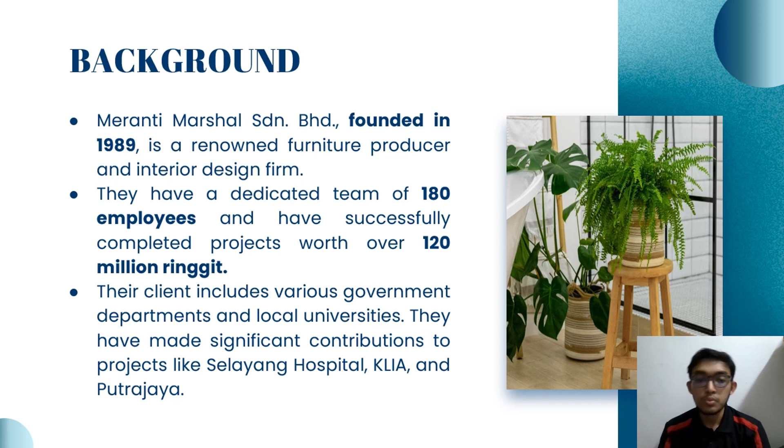Now we will proceed to the background of the company. Meranti Marshal Sendirian Berhad was founded in 1989, and it is a renowned furniture producer and interior design firm. They have a dedicated team of 180 employees and have successfully completed projects worth over 120 million ringgit. The clients of the company include various government departments and local universities such as UMK, UKM, and also including our UiTM. They have made significant contributions to projects like Selayang Hospital, KLIA, and also Putrajaya.

So these are the overview of the company. The headquarters is in Bandar Baru Bangi, and the manufacturing facilities is at Olak Lempit Furniture Complex in Banting. This manufacturing facility is where we went to do our industrial visit, and it is a highly automated manufacturing process.

The facilities include CNC metal and woodworking machineries, sheet and metal sheet fabrication, electrostatic powder coating line, and also the assembly process. So all of the products will be made there.

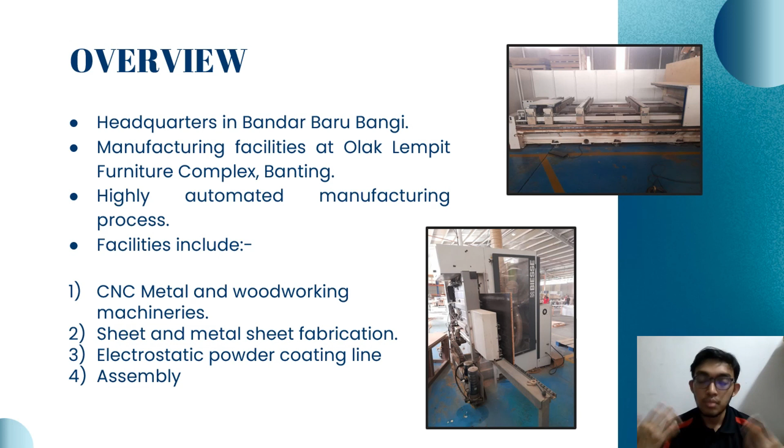So that's all for the introduction part.

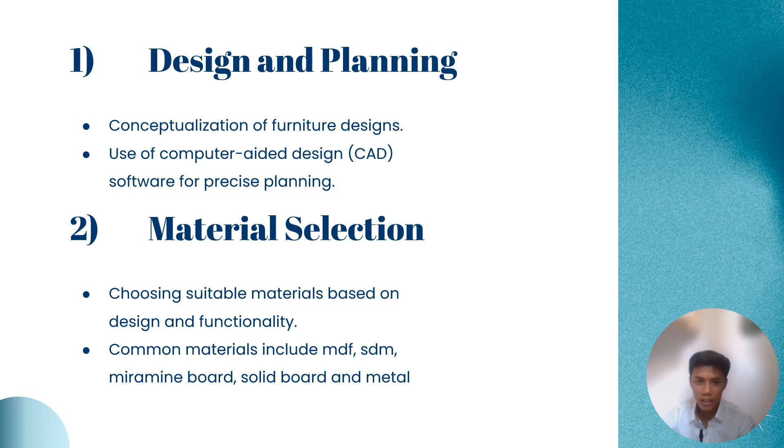For material selection, for the best product result, we choose suitable materials based on design and functionality. The common materials that we use for our product include MDF, SDM, melamine board, solid board, and metal.

Next, this is an example of material selection that we have.

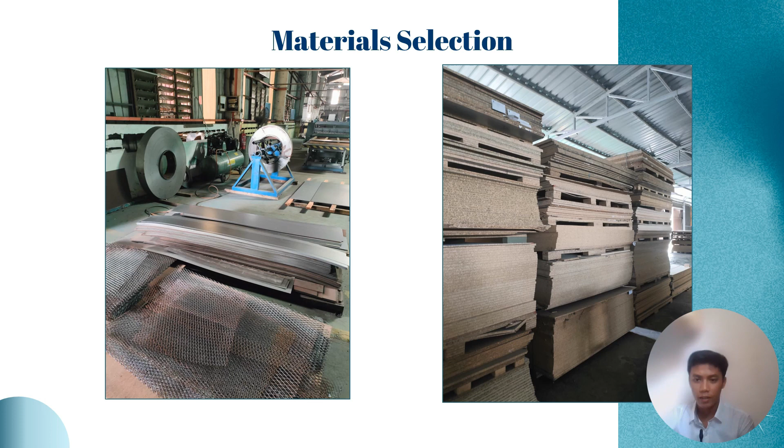For cutting and shaping, for more precision cutting of raw materials rather than using a saw, we use CNC, which is computer numerical control routers or laser cutting machines that operate on an AutoCAD basis. Then we shape our components through milling and punching machines.

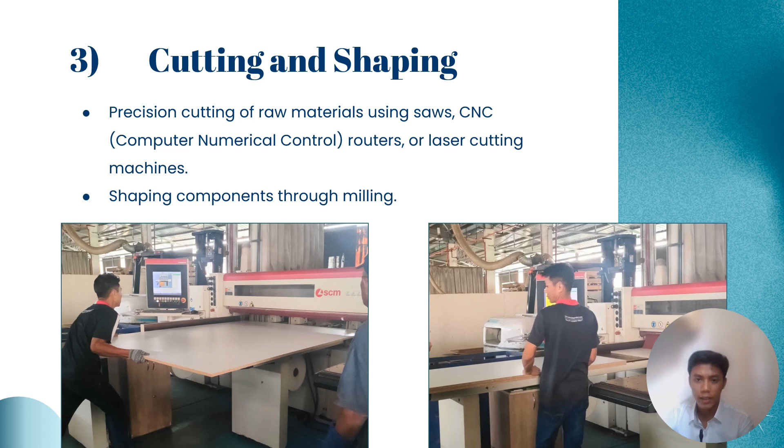This is an example of a laser cutting machine.

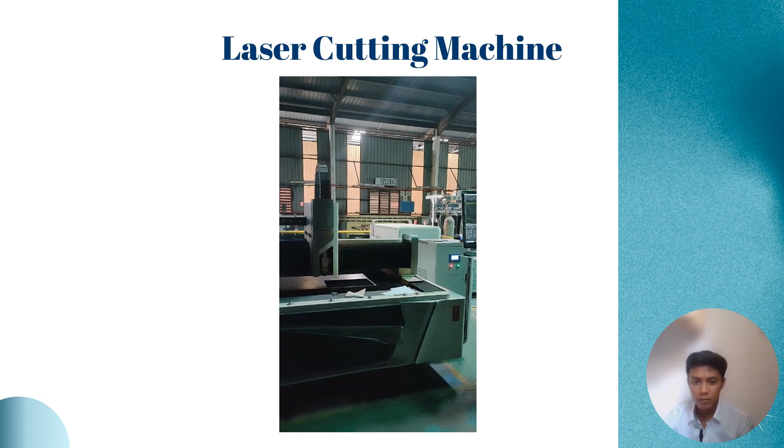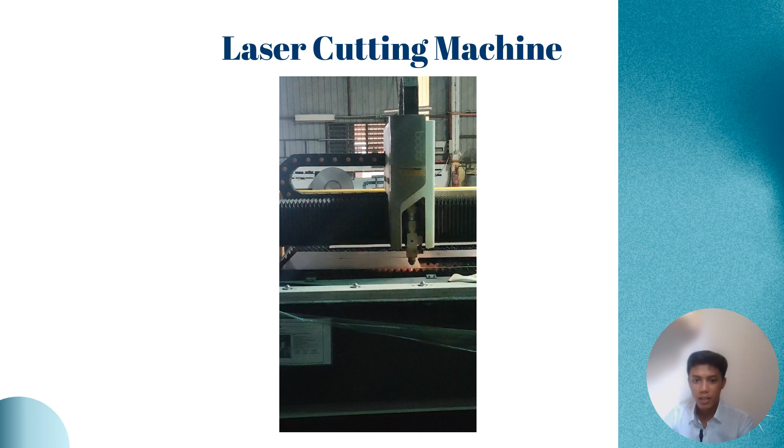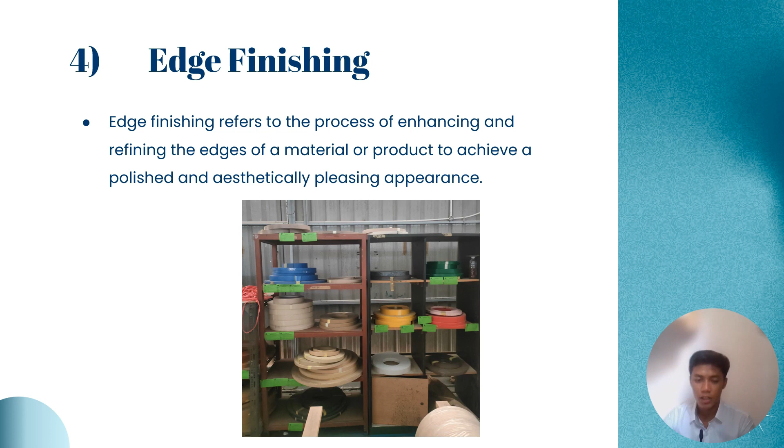Next, this is a plastic surface finisher machine.

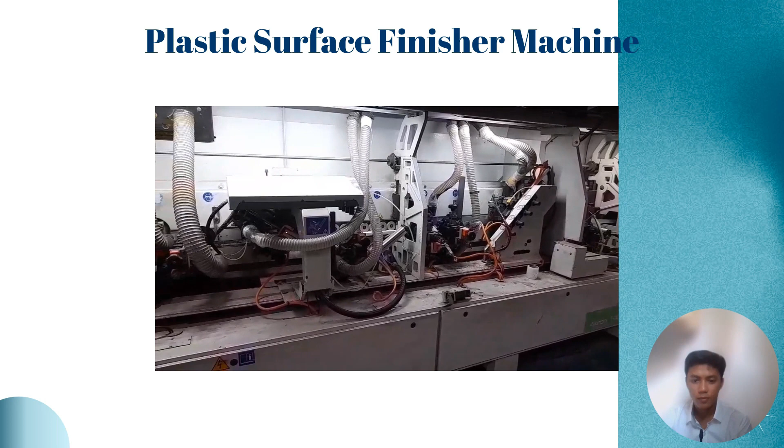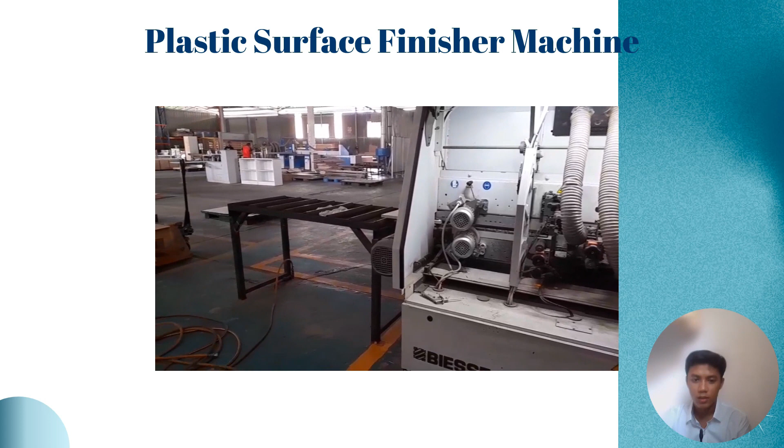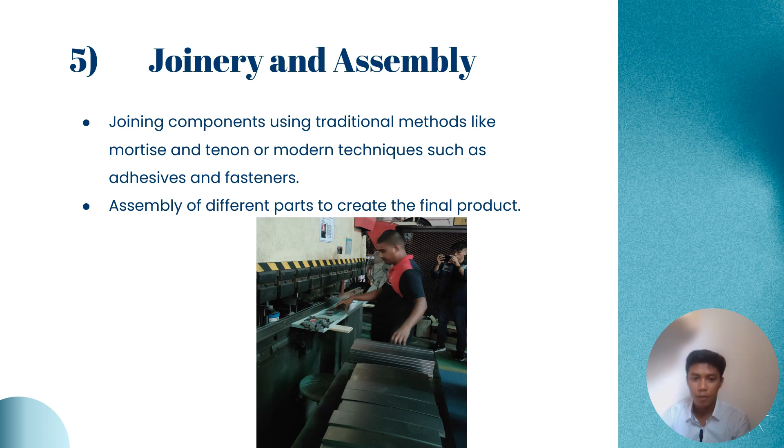For joinery and assembly, first we join components using traditional methods like mortise and tenon, or modern techniques such as adhesives and fasteners. Then we assemble different parts to create the final product.

For finishing, before going out to customers, every excessive part needs to be sanded and smoothed to ensure a polished appearance. For certain products, metal products especially, the application of finishes like paint is needed to make sure it stands against corrosion and rust. Stains, varnishes, or laminates are also used for protection and aesthetics.

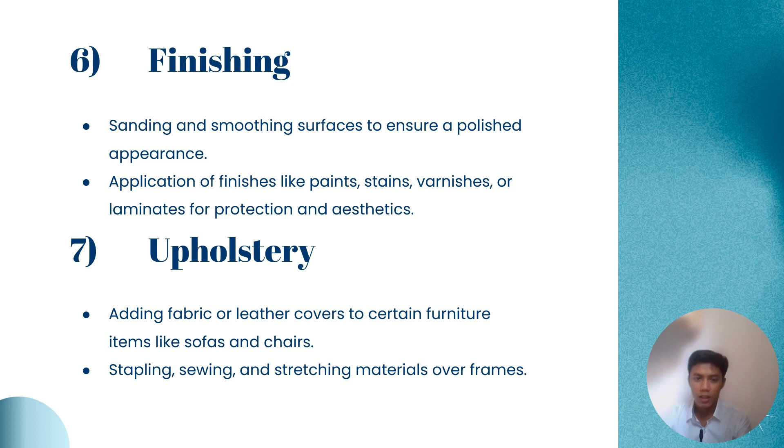For upholstery, we add fabric or leather covers to certain furniture items like sofas and chairs, including stapling, sewing, and stretching materials over frames.

For quality control, before handing out our products to the customer, we inspect each piece for defects or imperfections. If there are defects, the products undergo restoration stages if fixable. If not, we create a new one. Final inspection ensures dimensions, finish, and overall quality meet specified standards and customer requirements.

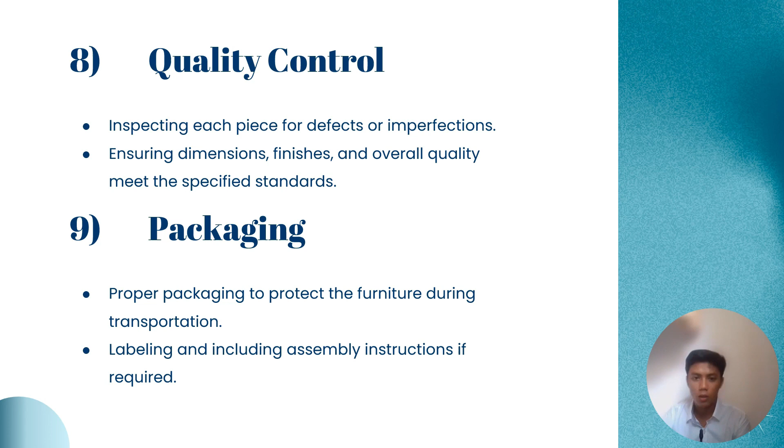Next, the packaging. Proper packaging protects the furniture during transportation. We label and provide assembly instructions if manual installation is required. But most of the time, we go to the customer's place and install the furniture ourselves.

For this slide, I'm going to present about defects or quality issues that occur from the process. Number one is warpage, caused by uneven moisture content or improper drying of wood. The effect is twisting or bending of the furniture, affecting its stability.

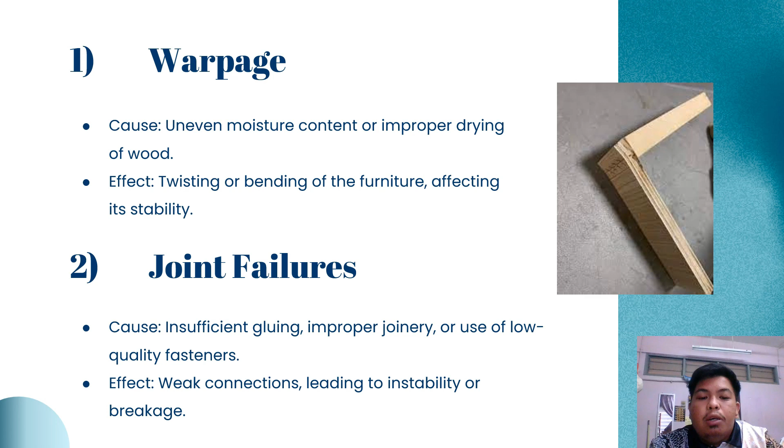Number two, joint failures caused by insufficient glue, improper joinery, or use of low quality fasteners. The effect is weak connections leading to instability or breakage.

Number three, cracks and splits caused by rapid wood drying, poor joinery, or internal stresses. The effect is visible cracks or splits compromising structural integrity.

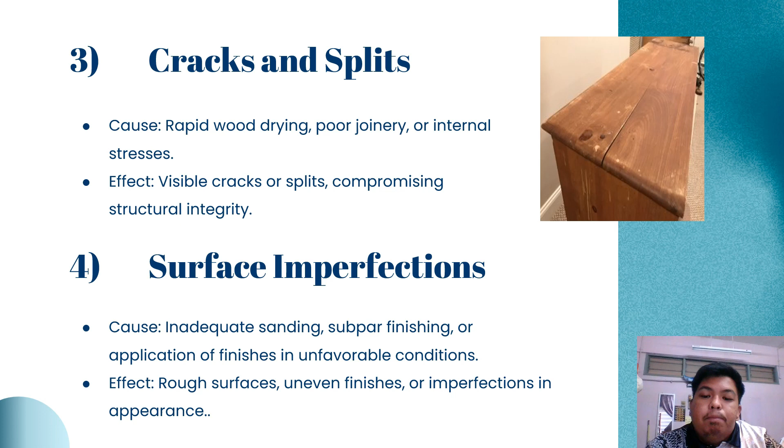Number four is surface imperfection, caused by inadequate sanding, subpar finishing, or application of finishes in unfavorable conditions. The effect is rough surfaces, uneven finishes, or imperfections in appearance.

Number five, assembly issues caused by incorrect assembly, missing components, or poor alignment during assembly. The effect is unstable furniture, assembly difficulties, or misaligned parts.

Number six, inconsistent dimensions caused by poor cutting or shaping process. The effect is furniture pieces with uneven dimensions, leading to fitting issues.

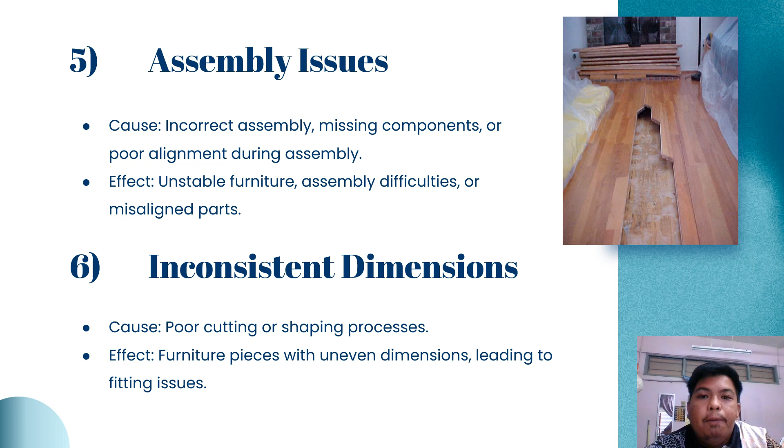Number seven, weak structural design caused by inadequate support or weak material in critical areas. The effect is structural failure, collapse, or instability.

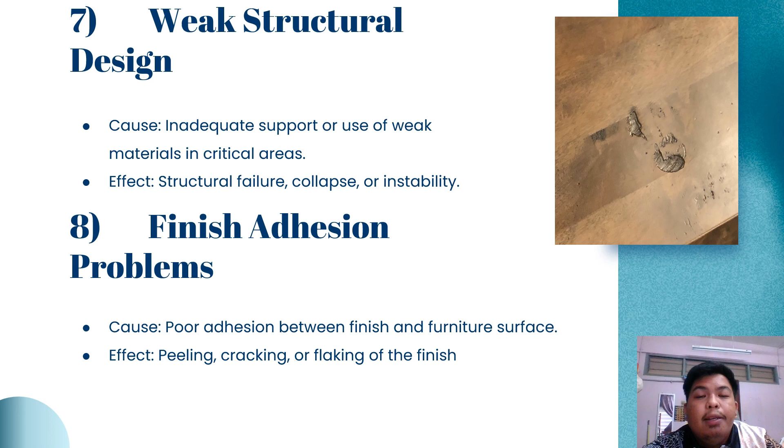Number eight, finish adhesion problems caused by poor adhesion between finish and furniture surface. The effect is peeling, cracking, or flaking of the finish.

Next, color variation caused by inconsistent staining or finishing processes. The effect is mismatched color on different parts of the furniture.

For the last one, poor upholstery work caused by inadequate stitching, improper stretching, or use of low quality upholstery materials. The effect is wrinkles, loose fabric, or discomfort in upholstered furniture.

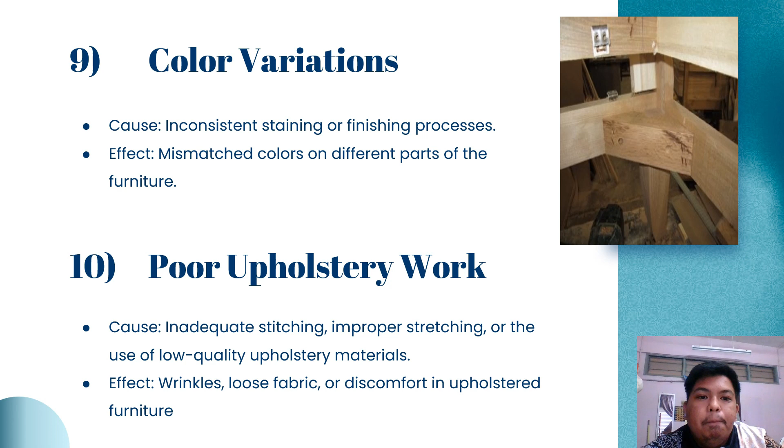So that's all for this slide.

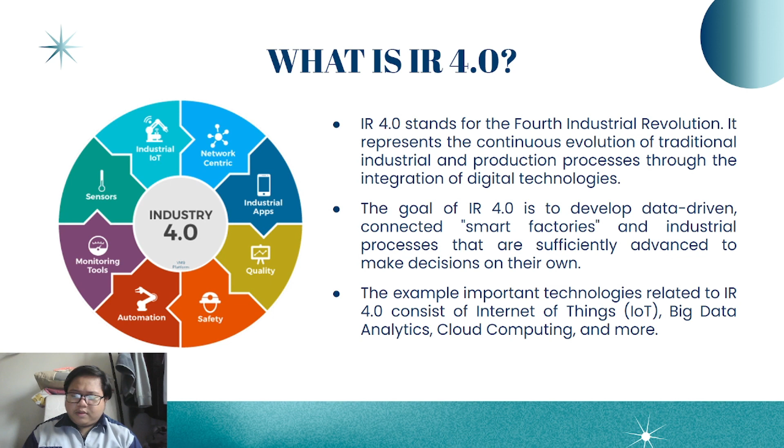There are many examples of IR 4.0, such as IoT (Internet of Things), big data analytics, cloud computing, automation, sensors, and more. In this company, they have several elements of IR 4.0 that are adopted.

The first one is IoT, or Internet of Things. In this company, they use integration of sensors and smart devices in furniture for real-time monitoring.

The second one is big data analytics. They use data-driven decision making for optimizing production efficiency and improving their product quality.

The third one is AI, or artificial intelligence. In this company, they use AI-driven design assistance for creating innovative and optimized furniture designs.

The next one is automation. When we see the machines, they have many advanced technologies to perform tasks with minimal human intervention.

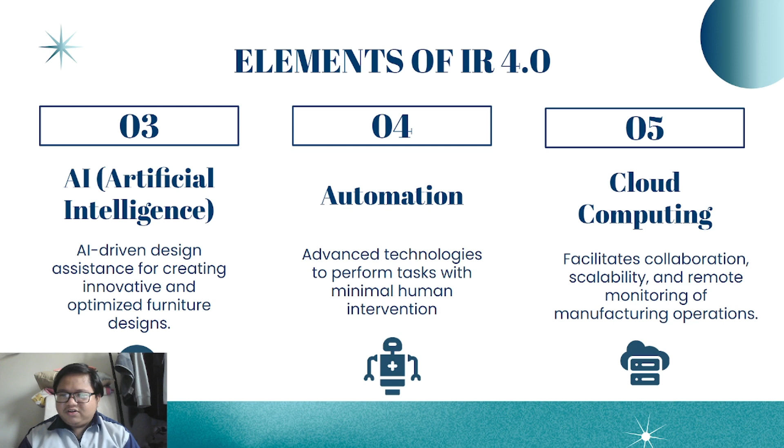The next is cloud computing. We can also see in the machine they have facilities for collaboration, scalability, and remote monitoring of manufacturing operations.

Next is blockchain technology. This company ensures the authenticity of materials and products. Since they have material selection for their products, they adopt this blockchain element to ensure authenticity of materials and products, reducing the risk of counterfeiting.

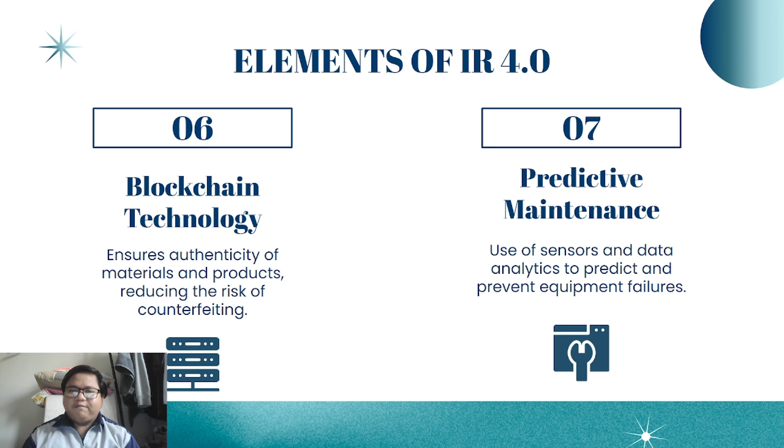The last one is predictive maintenance. We can see on their machines they use sensors and data analytics to predict and prevent equipment failures.

Now I will show an example machine that adopts the elements of IR 4.0. The first one is the CNC point-to-point machine, implementing sensors and a monitoring system to enable real-time quality control.

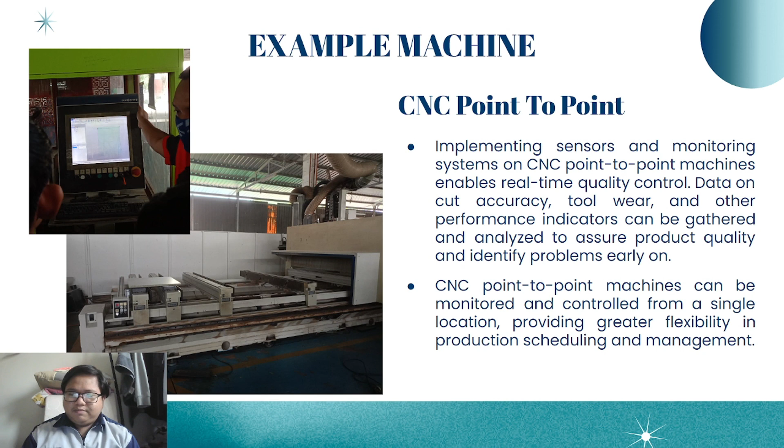Data on cut accuracy, tool wear, and other performance indicators can be gathered and analyzed to ensure product quality and identify problems early on. This CNC point-to-point machine can be monitored and controlled from a single location, providing greater flexibility in production, scheduling, and management.

So the second machine is the laser cutting machine. We know that this CNC laser cutting machine helps develop a smart manufacturing environment, which improves productivity, flexibility, and responsiveness to market demands. This machine uses CAD or CAM software to generate digital models and simulation tools that can visualize and evaluate the cutting process before production. This software helps reduce errors and improve the production process. It also implements automated systems to enable quick task changes, reduce downtime, and improve overall production efficiency.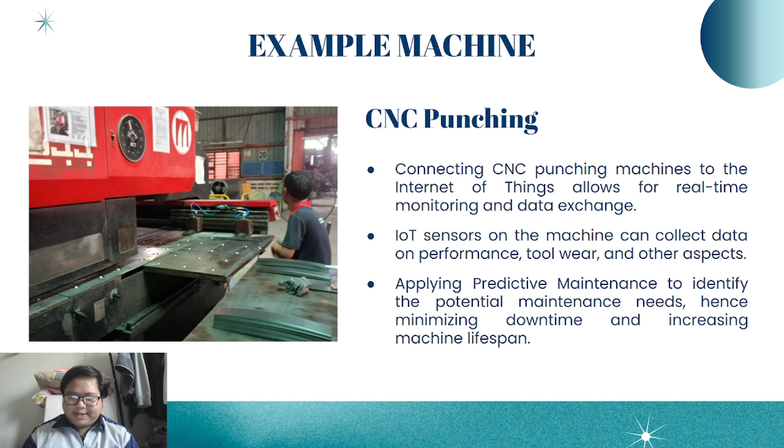For the next part, sustainability manufacturing implemented in this factory. The first one is material selection: the use of sustainable materials like choosing renewable resources, such as certified wood from FSC, the Forest Stewardship Council, such as MDF and melamine board, to minimize environmental impact. Melamine board is known for its easy maintenance and resistance to heat, moisture, and stains. MDF, on the other hand, is dense, flat, and has no grain, which makes it ideal for applications where a smooth surface is desired. MDF is a green product because it is created out of wood fiber and has no carbon footprint.

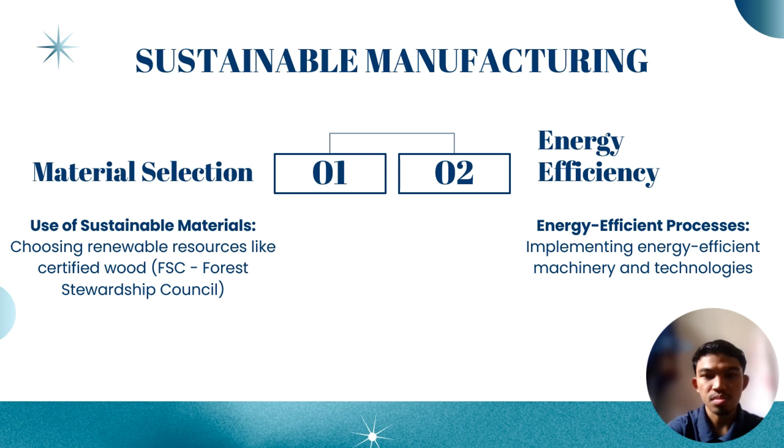The third one is waste reduction and recycling: implementing efficient resource use and lean manufacturing principles to minimize waste in the production process.

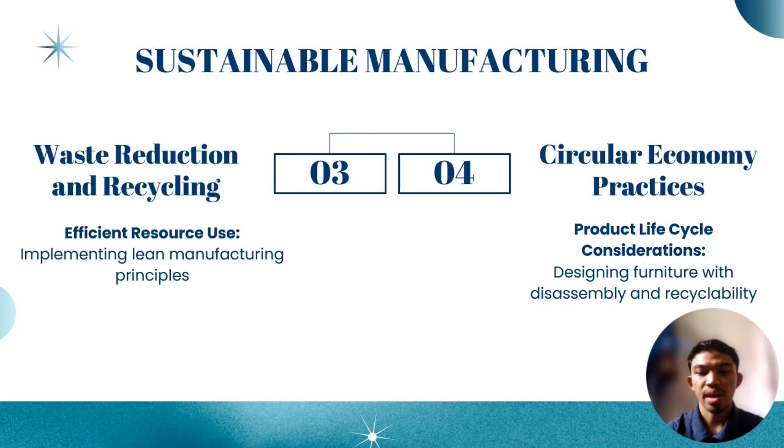The fourth one is circular economy practice, considering product life cycle. This means designing furniture with disassembly and recyclability in mind to facilitate easier recycling or repurposing at the end of the product's life.

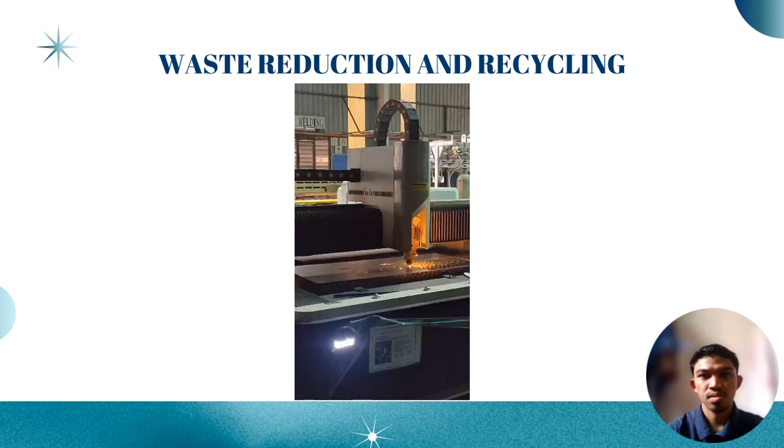Number 5 is reducing emissions through efficient resource use: optimizing transportation logistics to reduce greenhouse gas emissions in the supply chain.

Number 6 is water conservation: water recycling, incorporating water recycling systems to reuse water at certain manufacturing stages.

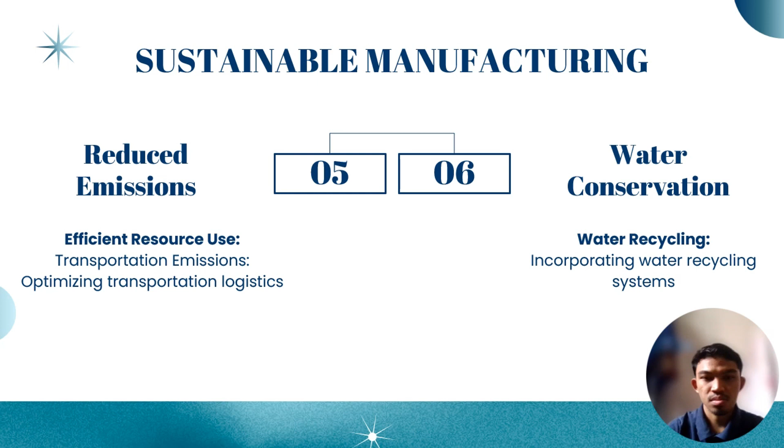Number 7 is certification and standards: seeking and obtaining sustainability certification such as FSC, Cradle to Cradle, or GREENGUARD to demonstrate adherence to sustainability standards.

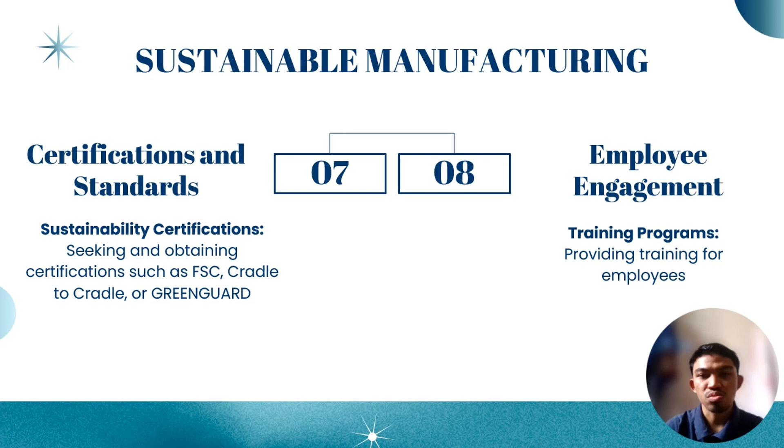The last one is employee engagement. This factory also provides training programs for employees on sustainability practices and encourages them to get involved in sustainable manufacturing.

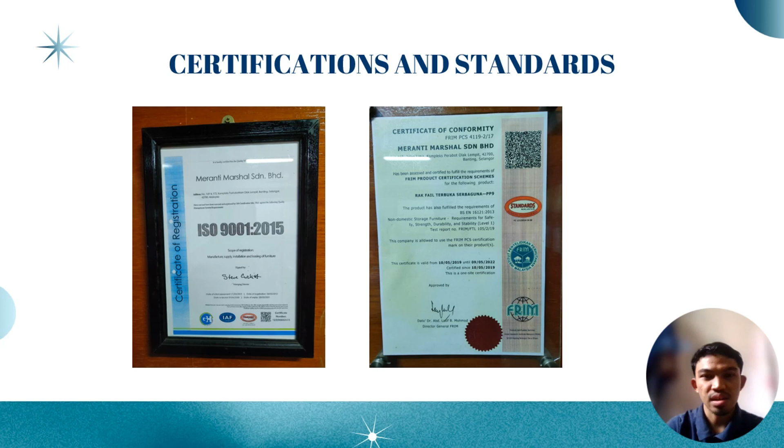So this is some of the certificates and standards that this factory has.

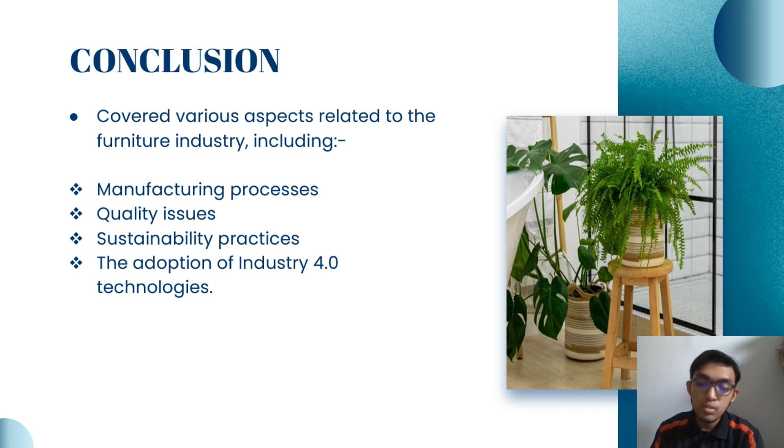The conclusion from this presentation is that we have covered various aspects related to the furniture industry, including the manufacturing process, quality issues, sustainability practices, and the adoption of Industry 4.0 technologies. Lastly, I would like to thank Meranti Furniture Sdn Bhd for allowing us to visit them and giving us the opportunity to grow our view about the manufacturing industries, and for helping us complete our subject requirement to conduct an industrial visit. That's all from us. Thank you.